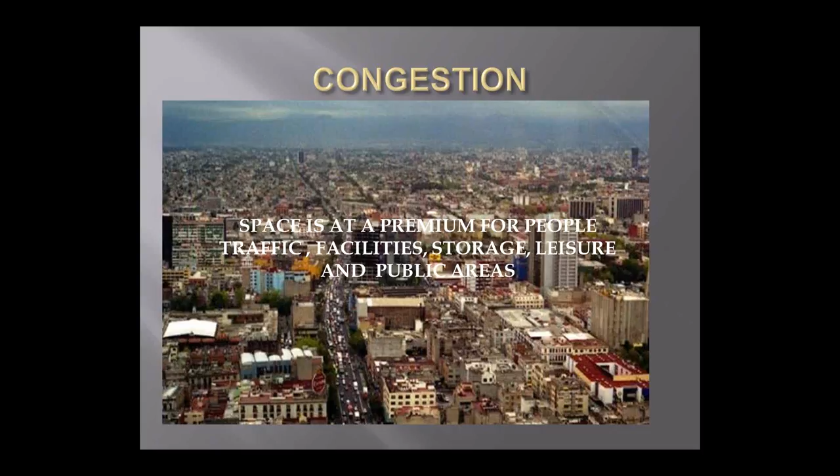One of the things we now know today is that 50% of the world's population has moved into urban areas, and it's predicted this will increase to 70% by 2050. Taking a look at this slide, you'll see we're getting pretty congested in a lot of these urban areas, and space becomes a premium, expensive and scarce. It makes people's lives unattractive if they don't have facilities, leisure and public areas. Somehow we've got to find space in these big urban areas, and developing underground is one possibility.

Now, there's nothing new about developing underground. As we all know, we've all traveled on metros and undergrounds, and these are very valuable in that they provide a method of transporting many millions of people each day, and reducing vehicle use, which is definitely beneficial.

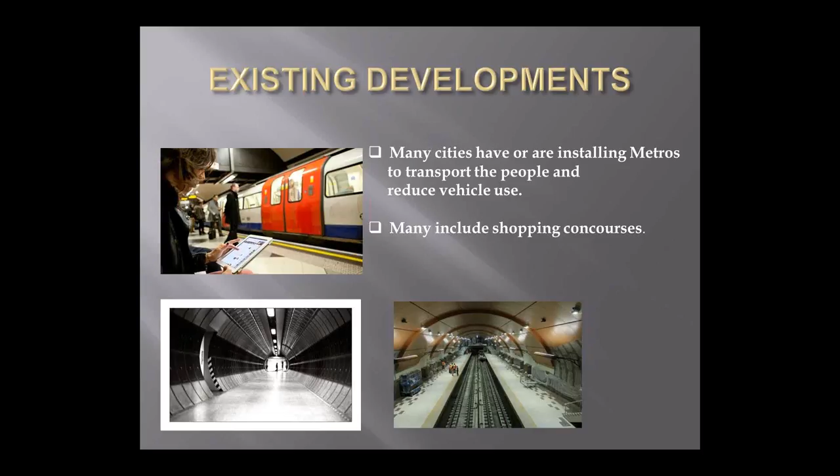Not only have these developments put in underground rail tracks, but many of the stations have taken the opportunity to develop commercial shopping concourses. If anybody goes to Hong Kong or a lot of other parts of the world, you'll find they include very substantial shopping facilities as part of the design. So already people are going underground, it's just how and where.

Here we've got some scenes. These are taken in Seoul, Korea, the two on the left, because there are huge areas of underground shopping and so on, and you can walk all over the center of the city without ever coming to the surface—it all interconnects. That's also true of other cities. Cities like Edmonton, and I believe Texas, have a lot of underground passages that allow you to go around. Houston has a lot of these underground passages that let you pass comfortably.

They have great advantages in many ways because they're very safe, there are no traffic problems, and they're comfortable in all kinds of weather. In Seoul it's because it's very cold in the winter; in Houston, because it's very hot all the time.

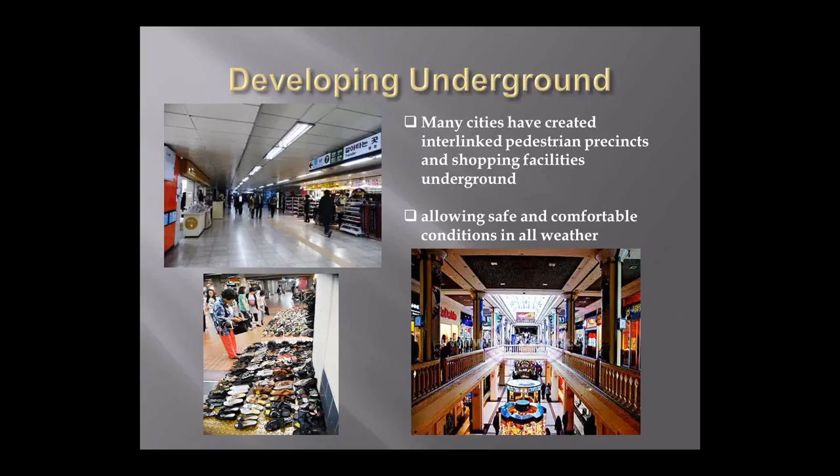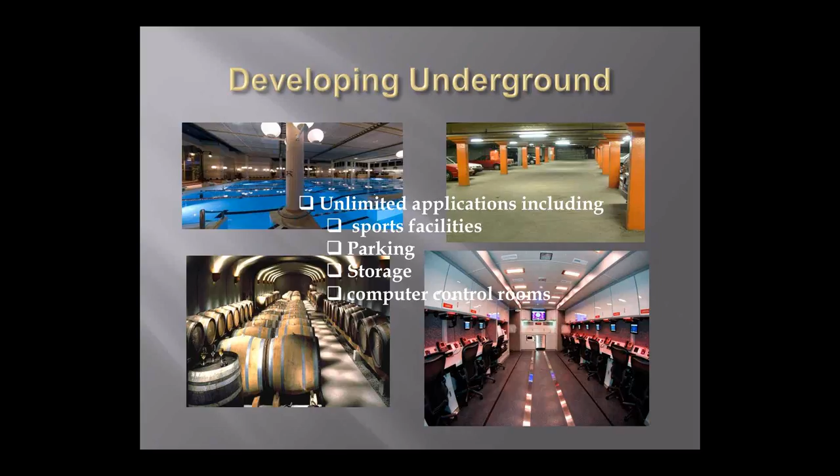Developing underground, when you think about it, there are lots of facilities presently on the surface that could be moved underground. Some already are, like parking, which I show there, but lots of sports facilities could be too. All these are underground shots. One of my favorites is the one on the left, the wine cellars—I'd definitely be interested in any projects of that kind. But all kinds of storage, like underground reservoirs for instance, would free up space at the surface. An interesting one is the computer control room to the right. Over and above that, you get military facilities, and lots of other things are possible.

So if we look at how these facilities have been constructed to date, we obviously have modern tunneling techniques, which have gotten up to about 15-meter diameter, and can be installed in all kinds of ground conditions using pressure balance machines, widely used for metro installations.

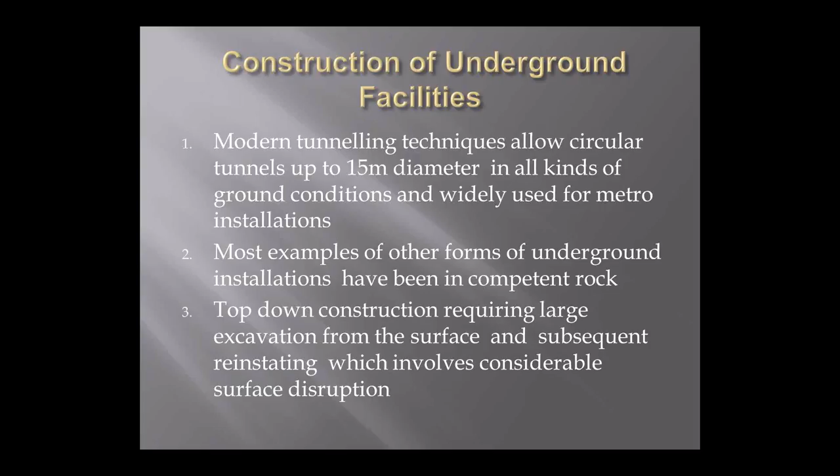Now, a lot of the examples I showed you previously were undertaken in competent rock. There's been a great number of underground facilities installed, for instance, in Helsinki, which is on competent rock and allows these things to be excavated out safely. If you want to do this kind of construction in areas that are not competent rock, in soft ground etc., up to now most of it has required large excavations from the surface and subsequent reinstatement, which obviously involves considerable surface disruption. What we're trying to do is eliminate that by constructing things in alluvial or soft ground soils, etc., which don't unduly disrupt surface facilities.

Let's talk a bit about horizontal construction. I had nothing to do with developing or formulating the first ideas on jacking pipes—that was done in the United States around 1890, as far as I can tell, jacking cast iron pipes into the ground to make culverts. I picked up on these ideas back in the 50s, and it's developed immensely all around the world.

We started with jacking pipes in, with men working inside them, but it wasn't long before we got into microtunneling, which allowed machines to do the excavation, with virtually no men working down the pipe—they were all working in the pit, adding pipes as each one was pushed in as the tunneling machine advanced. This has become an incredibly important method of tunneling in the last 40 years, and allowed a whole range of pipes, for instance in smaller diameters too small for men to work in, to be used.

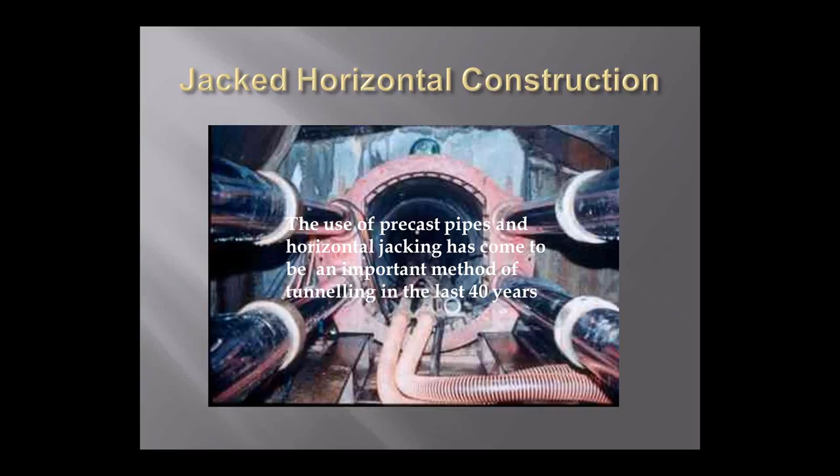But machines can do it without anybody having to be there with them doing the excavation. We won't go into that in too much detail, because it's a whole subject of its own.

But let's move on, because I'd like to talk about jacked horizontal construction of large structures. Way back, about 40-odd years ago, you'll see at the bottom is Brent Cross, UK, and that was one of the very first jacking jobs I did.

The principle of box jacking is shown on the right-hand side. You precast the box at the side, as you can see, and you jack it into position with excavation proceeding at the face. As excavation continues, you keep pushing it forward until you've got the thing into its final position.

That Brent Cross job was to open up a huge shopping centre, and the only access was under a main highway, so that's what we were jacking under there.

We've since been involved with maybe about 80 jobs, and one of the big ones that Chris was particularly involved with, and I was also involved with, though not to the same degree, was the Boston Big Dig, where they jacked huge boxes under the rail tracks, as mentioned in Chris's introduction.

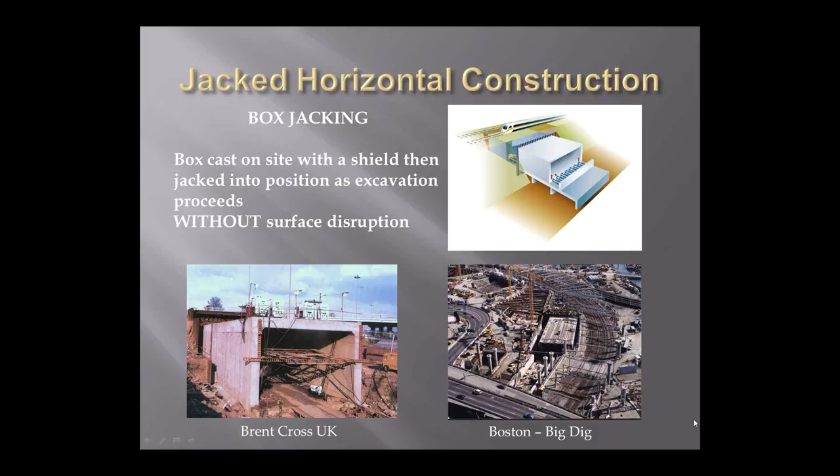However, that wasn't the easiest job in the world, because the ground conditions were pretty difficult there, and they had to freeze everything. That did cause some minor problems, let's put it that way.

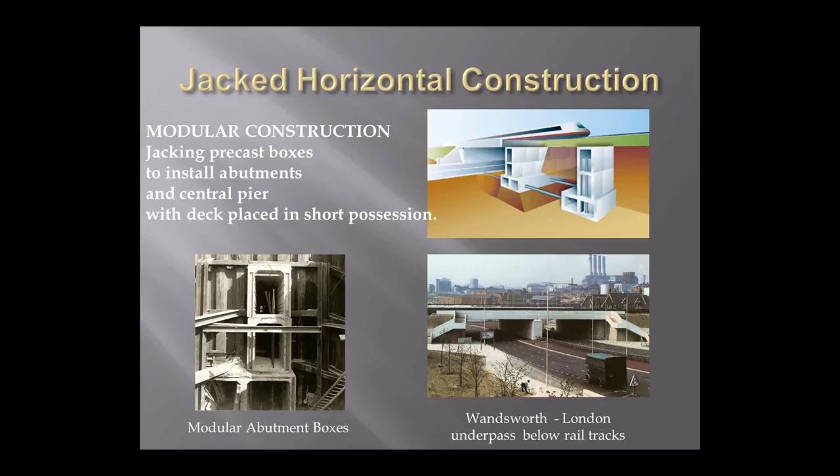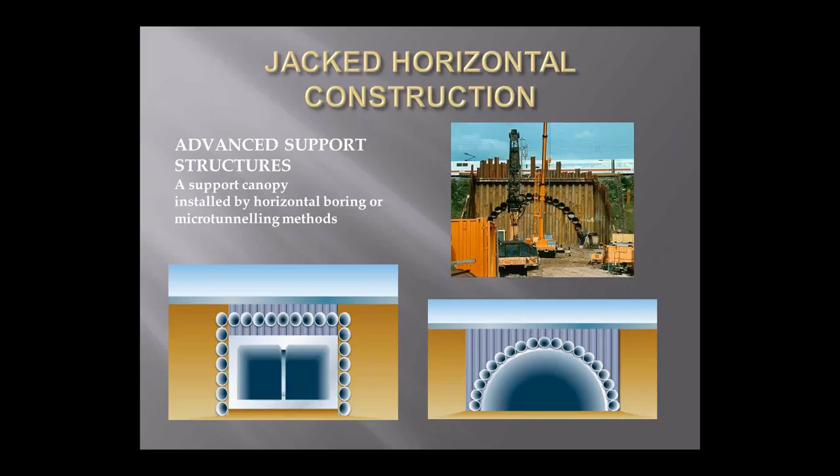Now I'm going to move on to some of our recent innovations. Firstly, the jacked arch, and then the jacked deck.

To simplify the concepts, both are based on breaking down the installation into controlled components, using high-quality precast units. Maybe the clever bit is combining tunneling with deck and arch units, jacked along a slide path.

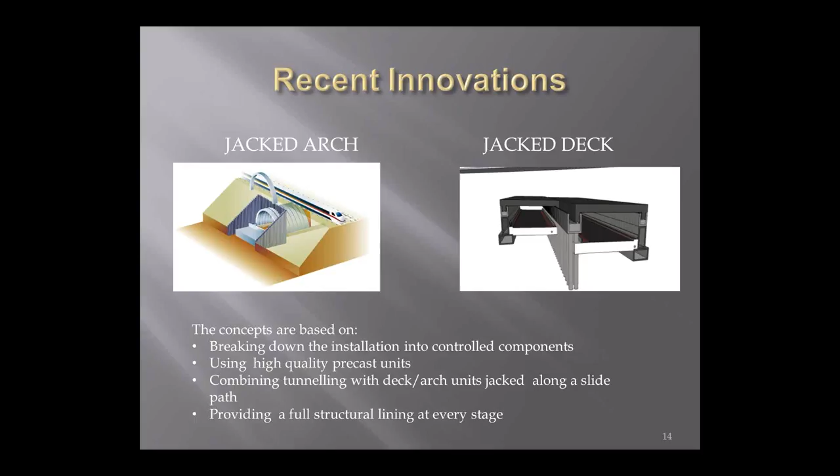So as you go, by either method, you're providing a full structural lining at every stage, which is a great advantage, as you can imagine, because we can't afford to have any collapses when you're putting one of these things under a railway. So these are the two concepts, and we've started to utilize them, and we believe they are an improvement on some of the traditional or existing methods being used.

We're going to illustrate this, and Chris is going to take over at this moment. He's going to talk to you about the Cliffsend underpass, which is an example of where the jacked deck was used. Now, Chris, I'm handing over to you, so you'll have the keyboard and mouse.

Have you got it? No? James, just give me one moment, I need to unmute him. We were having some feedback issues. Okay, there we go. Chris, can you hear us? I can hear you, I hope you can hear me. Okay, you've got the keyboard now, Chris, you should have the keyboard. I think you're still controlling it, aren't you, James? Well, I am, but okay, just a minute. Otherwise, James, if you just want to advance the slides, that might be the easiest thing to do. I'll just advance the slides.

Okay, good morning to you all. As James indicated, this section of our presentation shows highlights of a four-year cooperation between the main contractor and Jacked Structures during the development of the innovative solutions used to construct an extremely challenging new underpass beneath the existing mainline railway without causing any disruption to rail services throughout the construction period. Next.

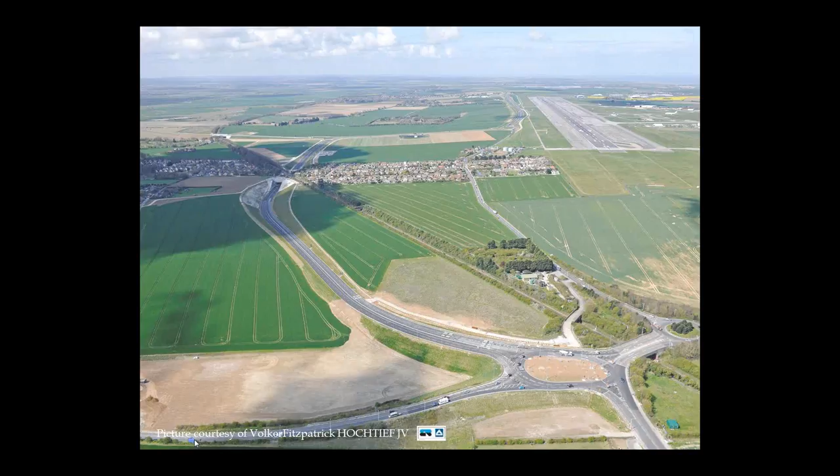Okay, well, to introduce this project, I'm starting with an aerial view of the completed Cliffs End section of the new highway. Here you can see the underpass section through the village of Cliffs End, the railway intersection, and on the right the Kent International Airport. At 126 meters, it is believed to be the largest jacked deck structure installed below live rail tracks in the world. The client was Kent County Council, the Highway Authority, and the main contractor was a joint venture of Volker, Fitzpatrick and Hochtief.

Construction projects do take a long time. The final phase was completed ahead of schedule and within the £87 million budget. The main construction contract was awarded by the Highway Authority in August 2009. Just go back, James, please. Just back, you want? Yeah. Okay, the start of the contract was October 2009 with an official opening in May 2012.

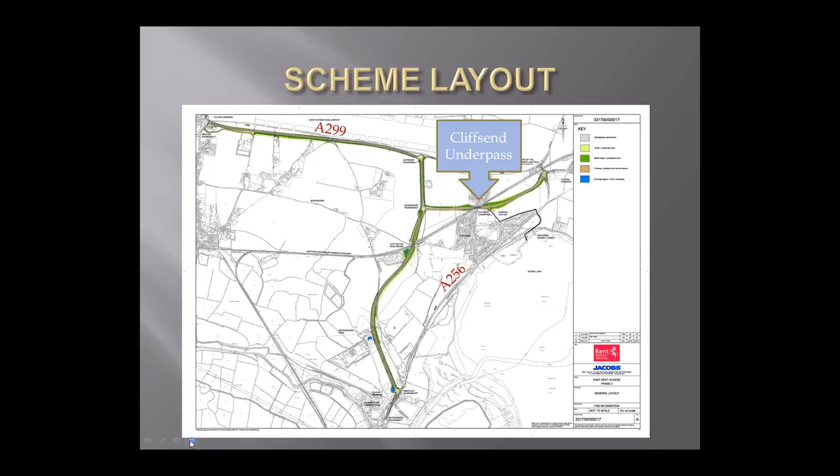There were many constraints in the area, including the operational requirements of the airport, the built environment around Cliffs End, and an internationally protected area known as Pegwell Bay, all of which restricted the choice of route for the highway. The only route available was through the middle of Cliffs End, beneath Foads Lane as detailed, and the main London to Ashford railway lines, which created the most challenging structure on the project at Cliffs End.

The construction operations obviously provided a formidable challenge, being constrained with 6 meters of overburden, heavily skewed, and in close proximity to the residential property you can see. There were a lot of main utilities, including sewers, substations, radio receiver masts, and Network Rail, who run Britain's railways. They were about to commence a new high-speed service to the new railway link at St Pancras International Station in London, and their rail operations were not to be disrupted during this construction stage. So the challenges were quite formidable.

Next. It's all right, there, I'm coming there.

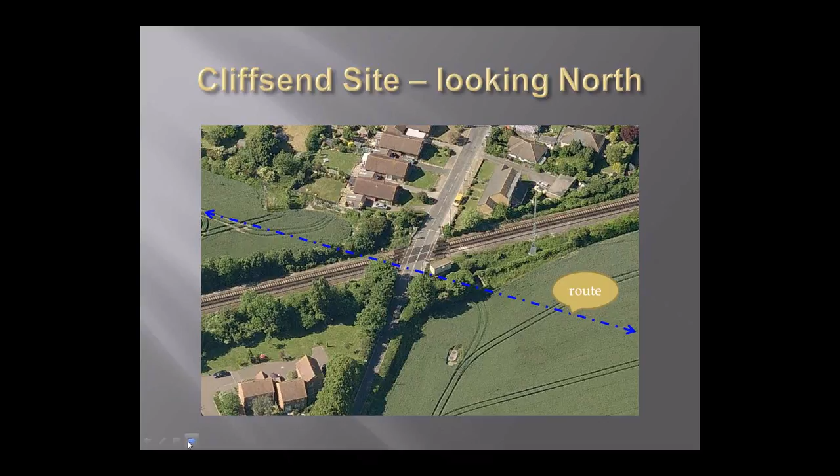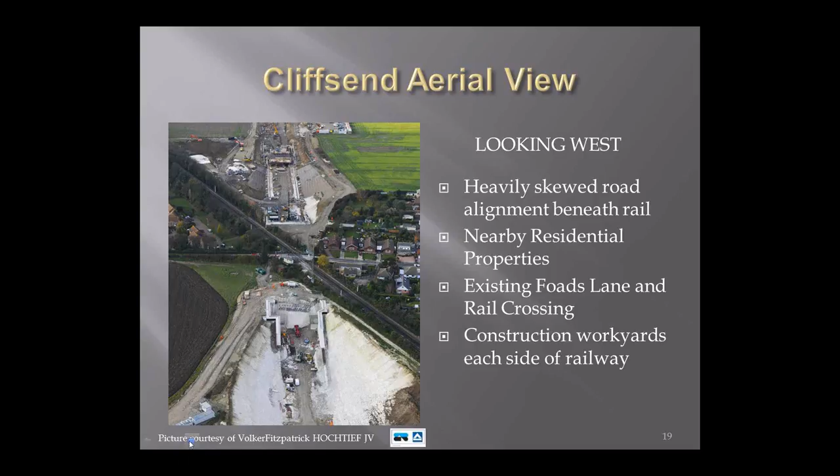This was based on a conventional twin large jacked box sections side by side. But due to various concerns relating to jacking capacity, controls on alignment, and the height of the open face, which could lead to unacceptable settlement, the team agreed to a different approach.

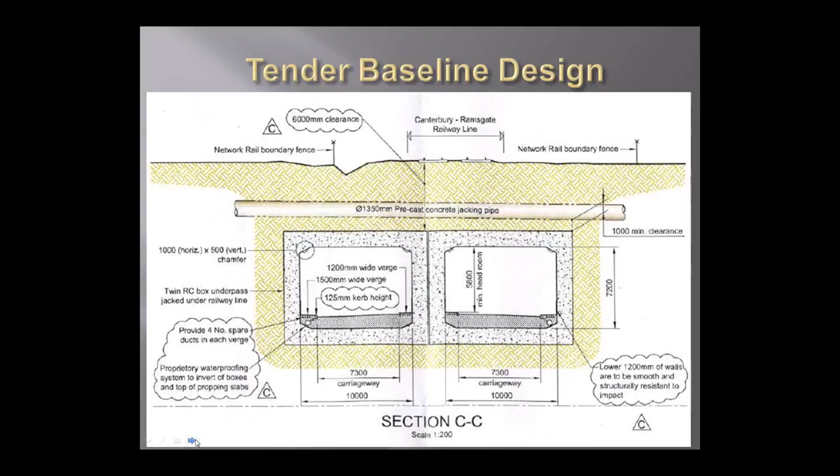That's the original twin box solution. Yep, there's the alternative. So these were the design alternatives that our team developed, and this was the tender proposal, which shows the jack deck on multi-level jacked boxes.

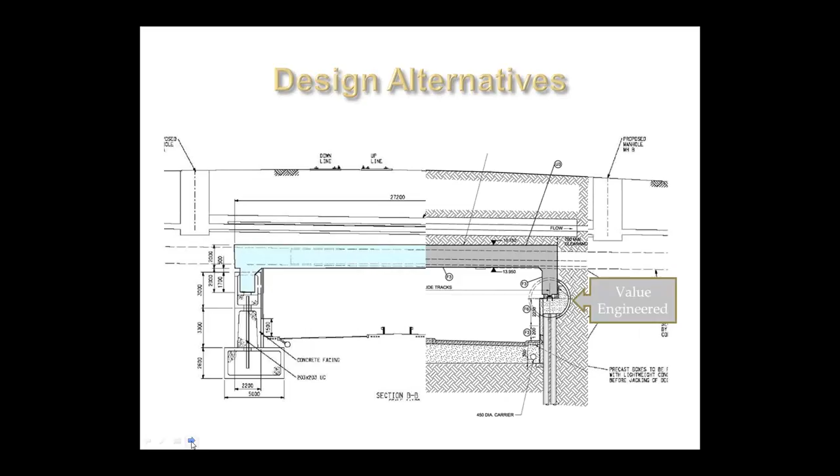Following award of the contract, the team carried out a number of technical reviews with value engineering, and on the right-hand side is an indication of the final solution that was chosen for construction after value engineering.

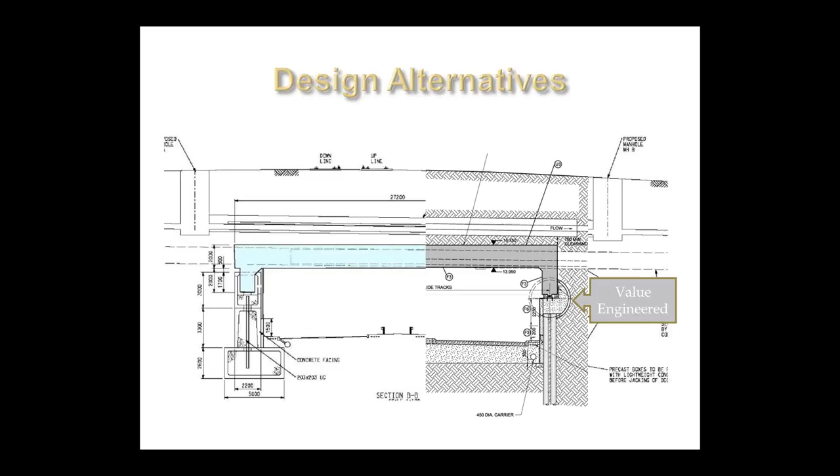The modular foundations were replaced with a large diameter bored tunnel within which reinforced concrete would form the abutment, and bored piles would provide the support to the adjacent ground.

Looking at the bored tunnel in detail, these provide horizontal space about 10 meters below the railway from which construction can be carried out safely without interruption to rail services above. The sketch indicates the various elements of the slide path, the reinforced concrete abutments, and the bored piles.

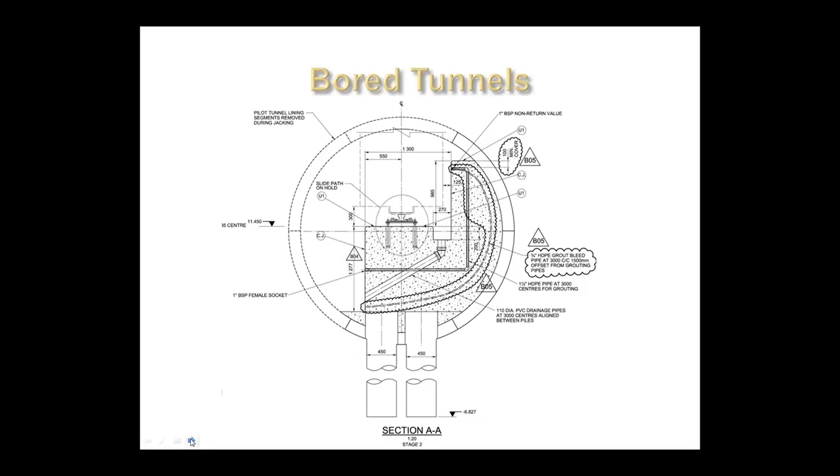Later, during the subsequent deck jacking operations, a number of roof segments would be removed to expose the slide track, but that would be within the protection of the main tunneling shield.

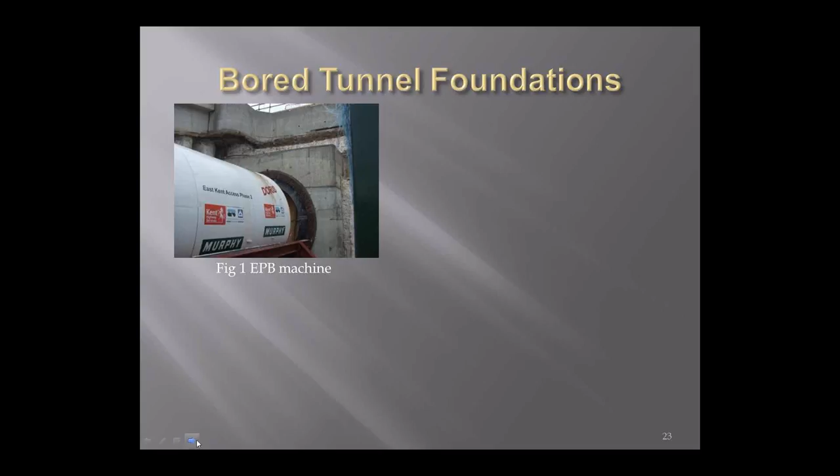Now we move on to an indication of the earth pressure balanced tunneling machine used to drive two 126-meter long tunnels. Rail track movement was continuously monitored from robotic total stations, and a vertical movement was detected of only 3 millimeters, which was splendid work by the tunneling team.

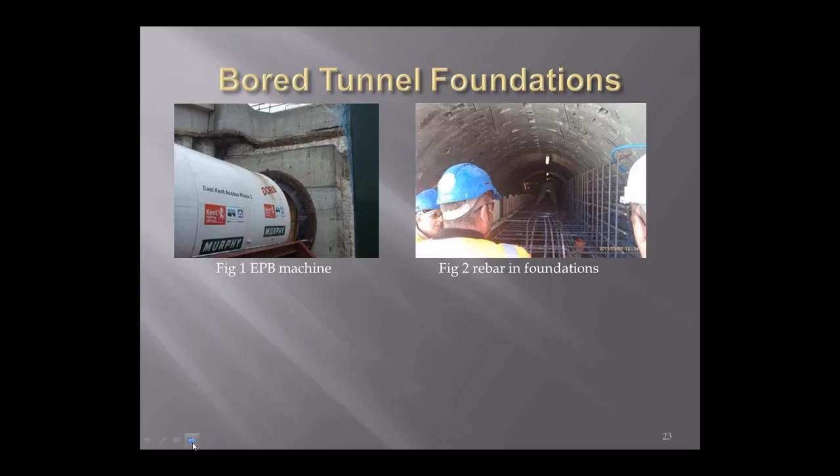This was immediately followed by the installation of 530, 450 millimeter diameter bored cast in situ piles. Reinforced concrete pile caps were constructed, and the photograph on the right gives an indication of the installation of the reinforcement within the tunnel to form the foundations.

One important point at this stage is that quality control is essential throughout, with close attention to tolerances to ensure installation of the deck could be achieved. You get one chance in these projects to get it right, and even minor out-of-tolerance construction elements have to be rectified fairly quickly. The main slide track installed within the abutments incorporates a stainless steel sliding surface along which the jack deck bearings slide.

The system consists of thick elastomeric bearings with a bonded PTFE surface, with a total vertical load applied of 50,000 tons. Flexibility is contained within the bearings, and the slide track installed to a tolerance level of plus or minus half a millimeter. The tunnels were completed within an 8-week program in 2010.

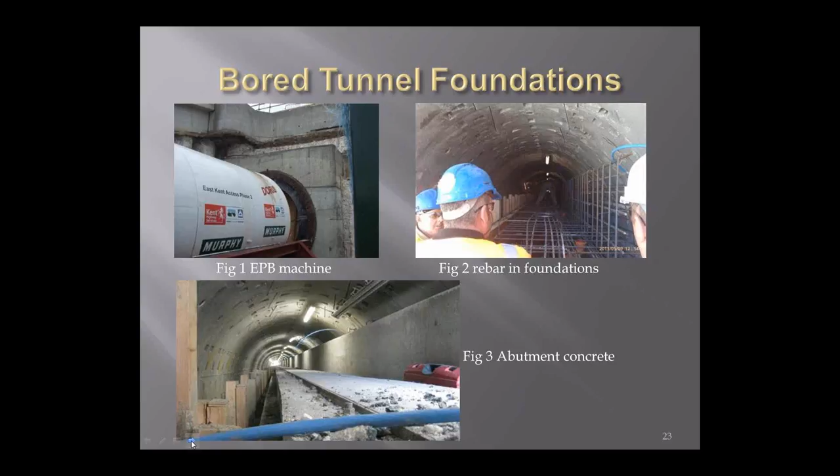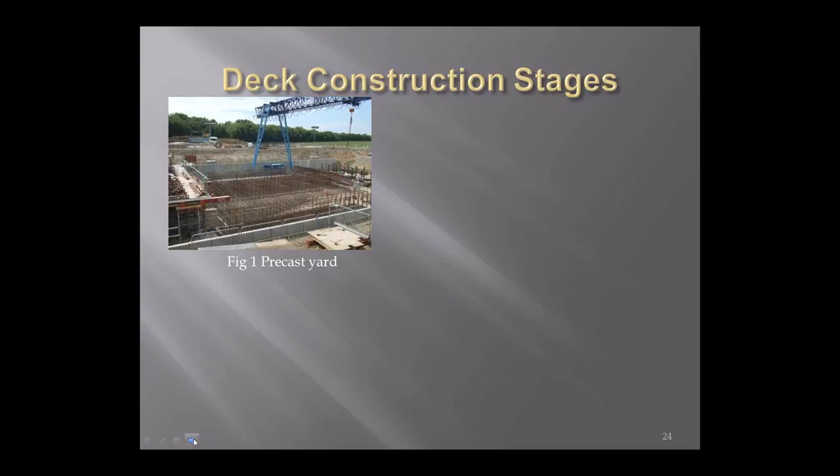So now moving on to the actual deck construction stages. The underpass roof comprised 6 abutting precast concrete deck units, each 23 meters wide, 22 meters long, and 1.8 meters deep, heavily reinforced slabs with short downstands.

Between each abutting unit, an intermediate jacking station is positioned with a steel skirt to maintain support of the overburden as the units open and close during installation.

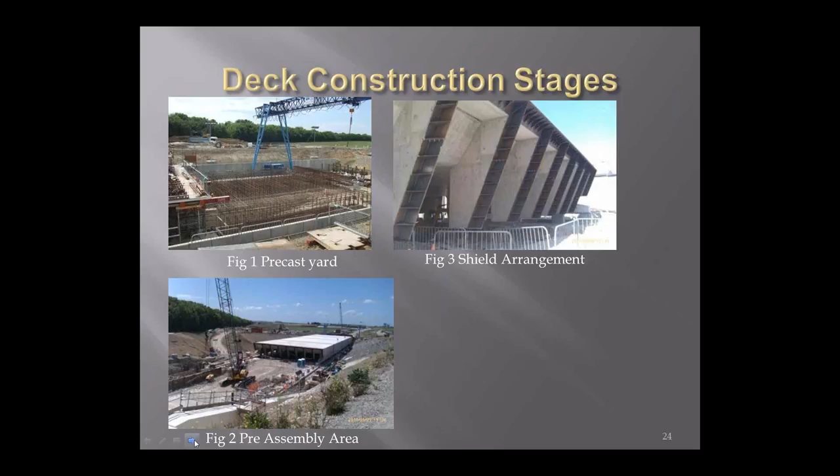The lead unit, figure 3, incorporates a mining shield with cutting plates designed to provide intimate support and contact with the open face excavation. 8 working cells provide space for the excavation plant and miners.

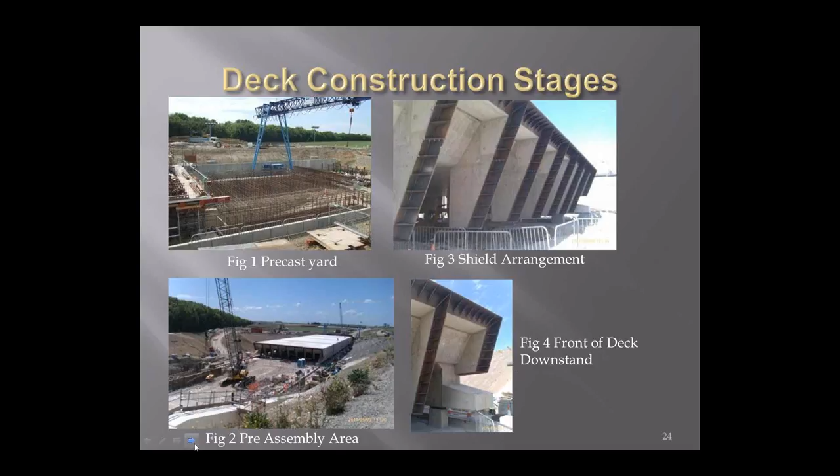The design is such that the lead shoe moves into the pre-bored tunnel on the slide track, and the clearance to the shield above allows enough area for miners to remove a number of the tunnel segments as the work proceeds. So again, close tolerance and close attention to detail is very important at this stage.

This is just a view of the pre-assembly area. The size of each deck unit required a casting yard some distance from the launch area, right at the back of the photograph. Then in sequence they were moved forward on temporary slide paths to an assembly area where the final fit-out could be undertaken before moving each unit in turn onto the launch pad.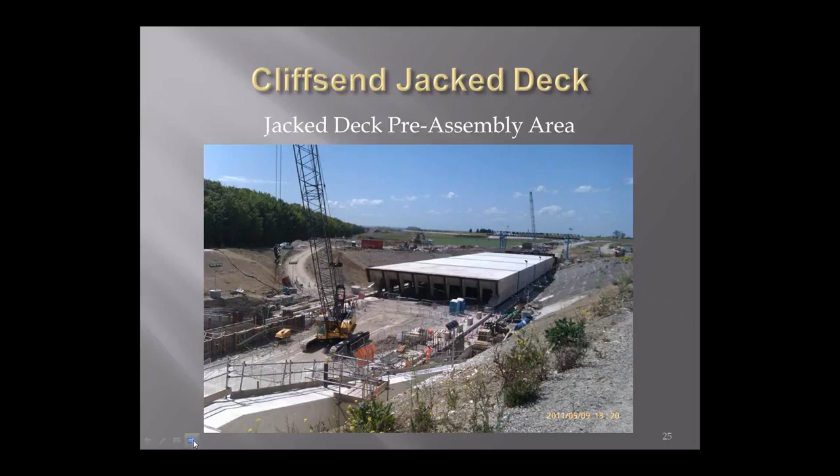The final fit-out could be undertaken before moving each unit in turn onto the launch pad. The actual casting yard was about 150 meters away from the shield entry point, before going beneath the railway.

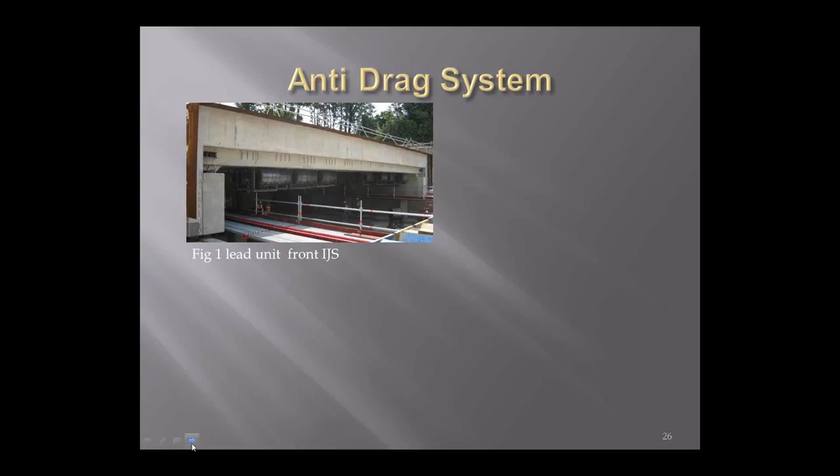An essential requirement for large underground jacking operations is to maintain ground stability and reduce frictional resistance from the unit in contact with the ground. It's been common practice when undertaking box jacking works to introduce what we call an anti-drag system between the top surface of the jack box and the overlying soil.

At Cliffsend, the general depth of overburden, being some 6 meters below rail track bed, is such that large-scale lateral movement of the ground was considered a very low risk. The shearing resistance at the sides of the ground block above the proposed deck offers ample resistance against wholesale lateral movement. But lateral movement of soil at the interface between the deck and the overlying ground could occur due to frictional forces, and such migration as the deck is installed could be expected to contribute to settlement or heave on either side of the railway.

And for this reason, an anti-drag system focused upon the need to mitigate ground migration.

Figure 2 shows the sheets. They're stored in rolls in the roof of the front unit. These sheets are high-quality steel, 2 millimeters thickness, and they comprise 2 sheets per drag sheet in order to deal with the high tensile forces developed as the jacking proceeds. At figure 3, the head wall anchorage system can be seen. This is the leading or free end of the drag sheet. It's fed up through slots in the shield and then anchored back to the head wall above, so that when the deck unit moves into the ground beneath the head wall and under the railway, the sheets are gradually moved out onto the deck of the unit and remain static with the soil above.

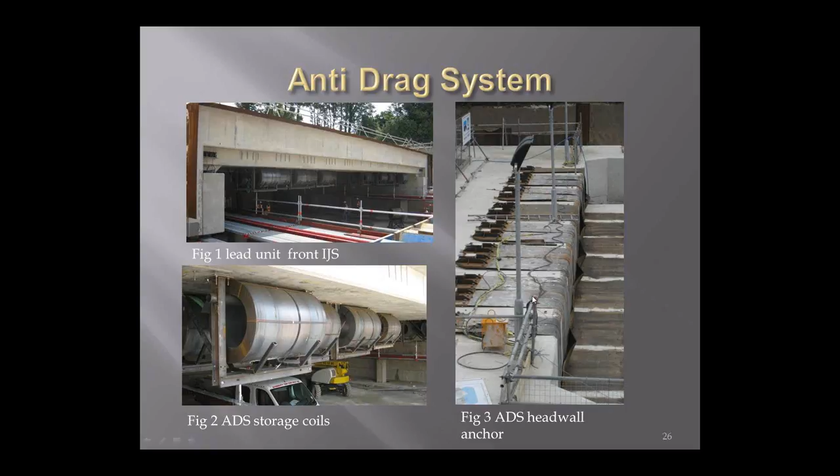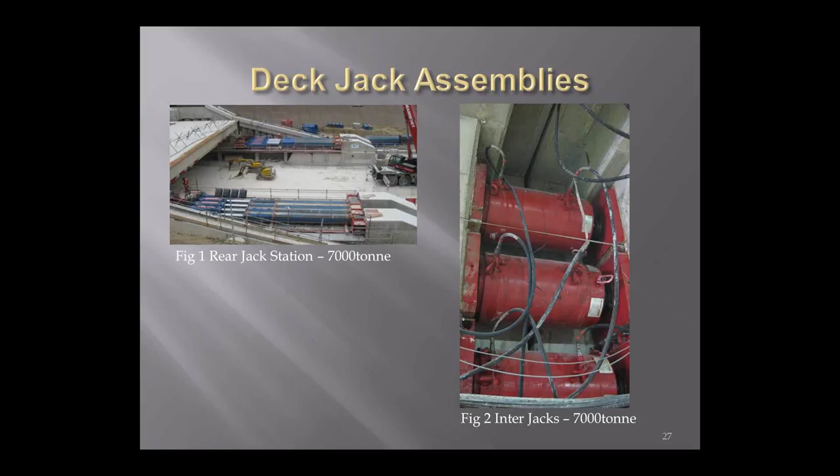Looking at the jacking system, 2 jack assemblies were incorporated into the project: rear jacking stations with a capacity of 7,000 tons, and intermediate jacking stations between each unit, also comprising 7,000 tons. The intermediate jacking stations had a stroke of 300 millimeters, while the rear jacks had a long stroke of 2.5 meters.

The project requires a very sequential movement of units from the launch pad through to final completion. The operation of intermediate jacks plus the operation of the rear jacks results in an accumulated jacking load applied throughout the whole job, and that graph indicates the total applied jacking resistance during installation. In fact, the combined load at completion of the job was under 15,000 tons. But you've got to have a lot of reserve capacity, which is required in the event that you might hit obstructions, or there may be some steerage requirements or other unforeseen situations. Having sufficient jacking capacity in reserve provides a certain benefit.

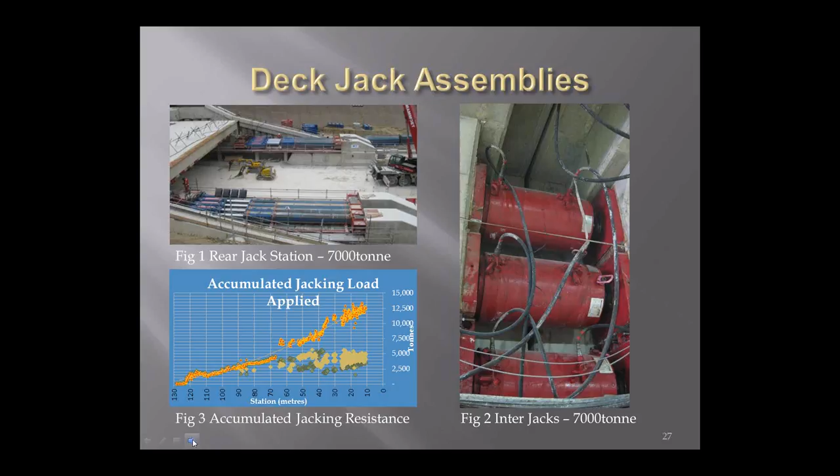Now moving into the front end, the working end of the shield. This is a view just at the start of the shield going into the ground. You can see in the roof the drag sheet rolls and the beginning of mechanized operation in order to gradually peel the material from the excavated face and remove it to the rear of the unit.

Ground conditions on this particular project were fairly competent chalk, but there was an alluvium-type material called Thanet Sands and gravels overlying the chalk, which did penetrate into the shield by up to about 2.5 meters. On the top corner of the shield that's embedded, you can see an indication of the Thanet Sand in that portion of the shield.

A later shot shows the shield fully penetrating the ground. The shield provides pressure which maintains support and mitigates any risk of ground movement during the continuous installation of these units. Each deck unit was installed in 7 days, with a turnaround time of about 3 days for installing subsequent units on the launch pad, totaling about 10 weeks for completion of the 126 meters installation.

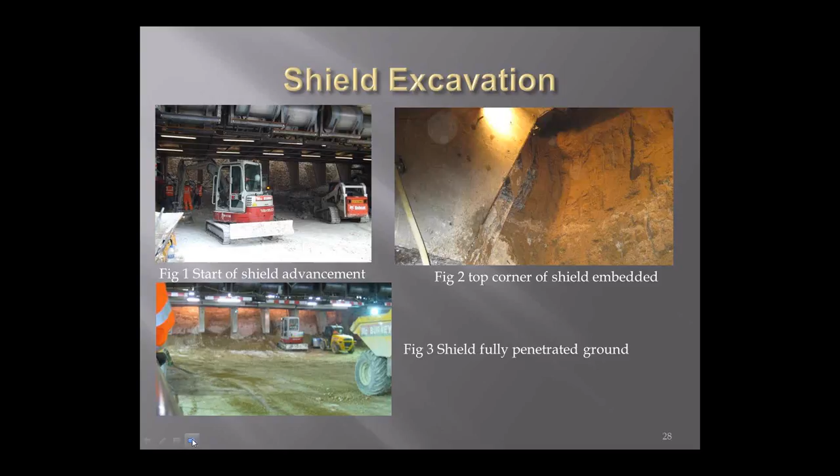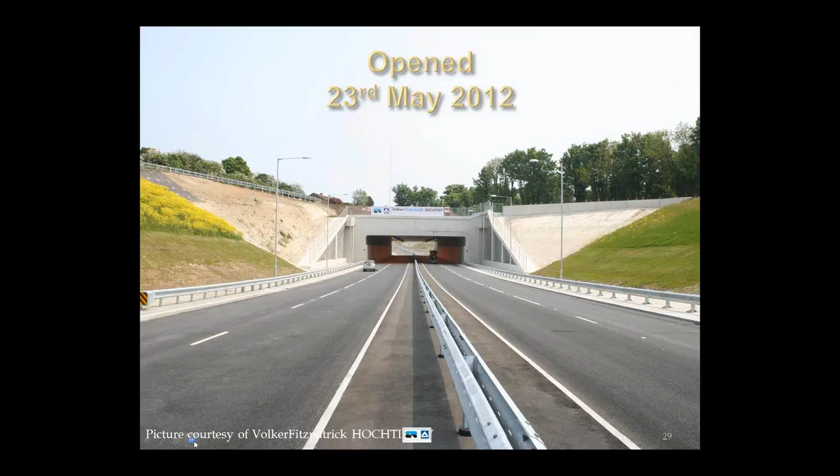A view of the completed job, opened in May this year, with quite a number of achievements. It was built 5 months ahead of schedule, built within budget, built safely, and most important, built without interruption to rail services. On that final shot, I'll now hand back to James, thank you very much for that section.

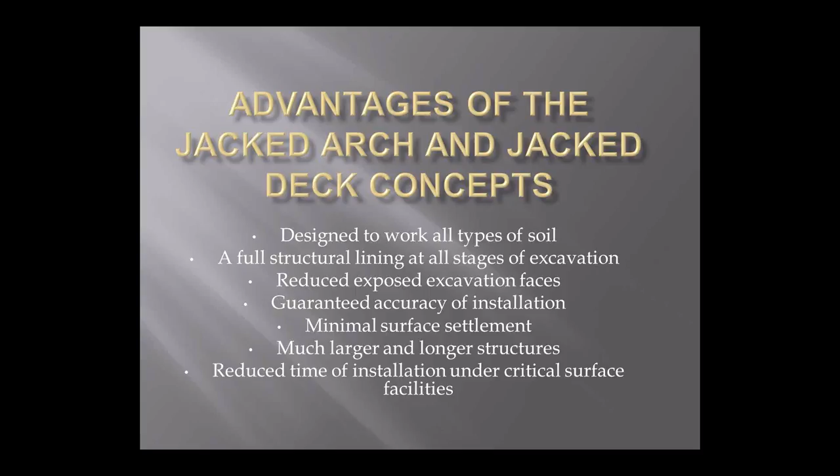And of course, what's important for a lot of the clients is the reduced time of installation under critical facilities. Now, I believe there are lots of opportunities for creating underground space, and a whole range of larger and longer underground installations are now possible in a wide range of configurations.

I would point out that many cities are built on the edges of rivers next to the ocean and are not on competent rock. They are on alluvial type conditions, so putting large structures underground is more difficult. But I believe we've got some potential answers.

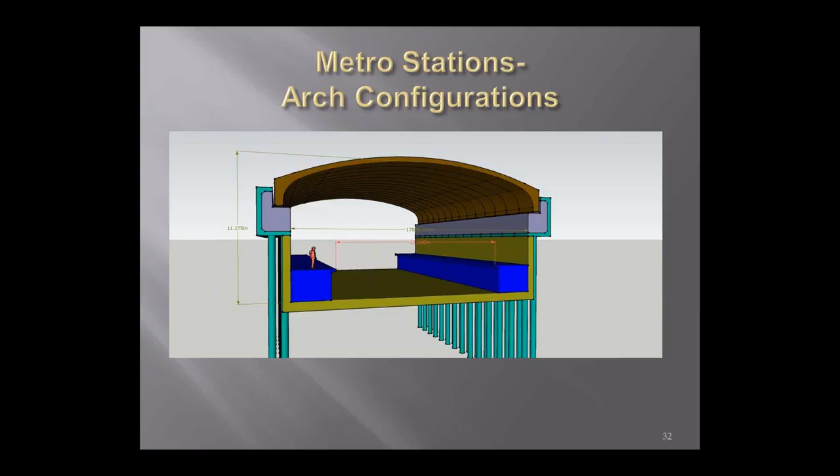One of the things we've done is develop a number of possibilities for putting full metro stations in. Here's one example where we've used the top box with piles out of it and a flat arch. But there are others—we could use abutment and a flat arch. We've got the modular foundations there and the walls. You could easily arrange a four platform arrangement if you wished.

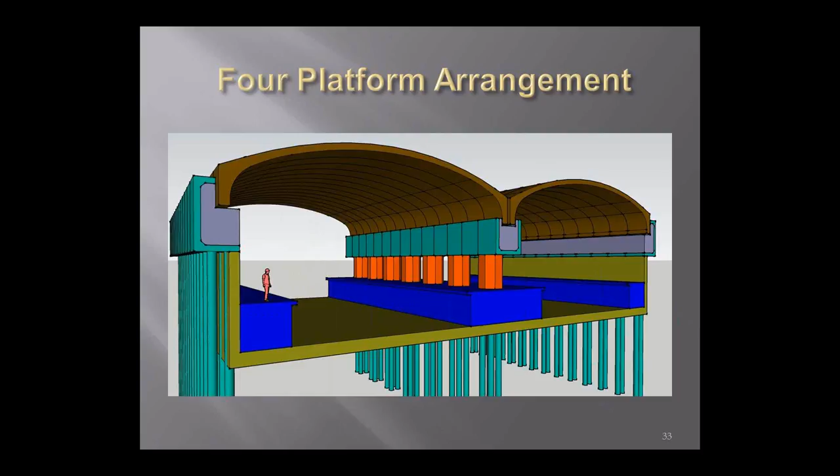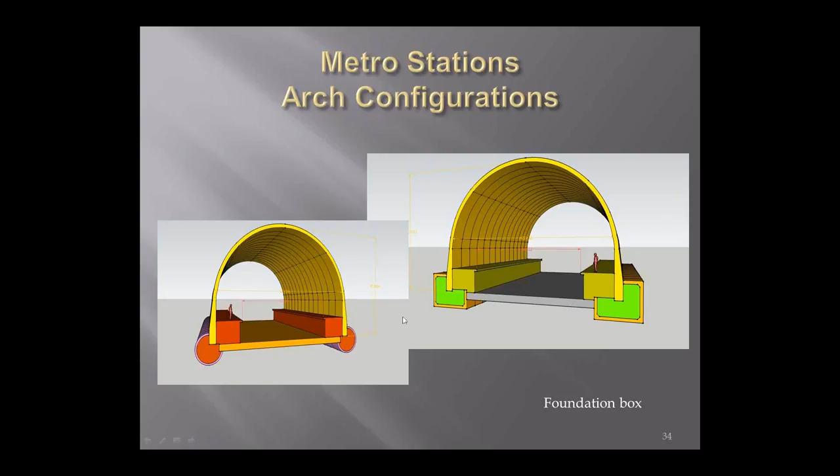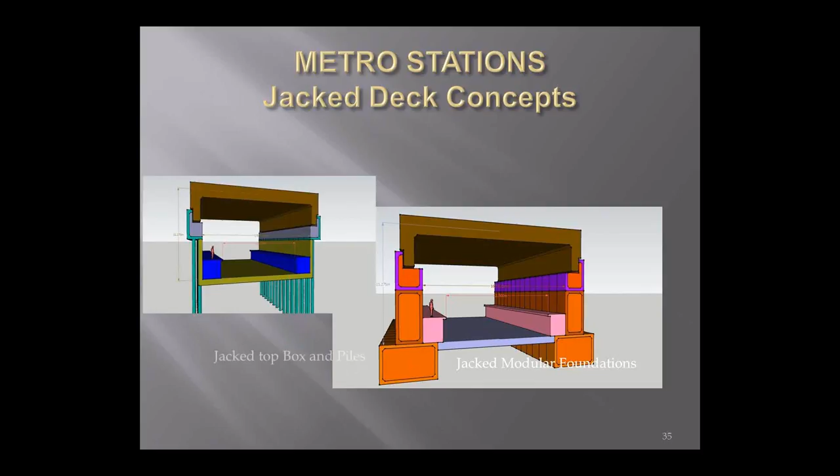The jacked deck concepts also lend themselves to all kinds of structures. There's the jacked modular foundations with the jacked deck like we used at Cliff's End, but for a station it's much smaller than Cliff's End's 20-meter clear span. Here you would want something about 10 meters, more than sufficient for most rail metro stations. And there's another alternative—top box and piles.

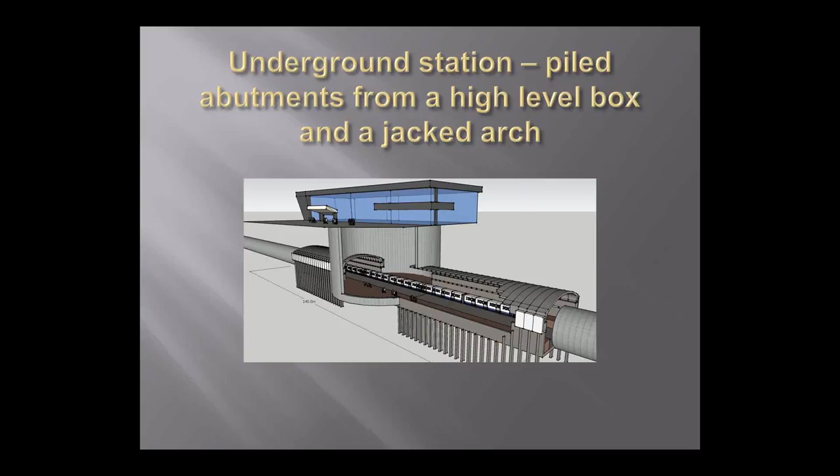And here's finally our concept of how we would undertake a full metro station from the top. We would sink that central shaft, which is required for access anyway, and from there we would install the rest of the station by jacking, in this case, a high-level box and a jacked arch. And there is the concept that we're suggesting for metro stations, but you can apply these things in all kinds of ways underground. I set out a number here.

And I've added, apart from the ones I mentioned earlier, wastewater and water treatment plants, because certainly in a lot of cities, those plants take up a lot of room and are not exactly the ideal thing to have in a large urban center.

And another one—they're doing this in Hong Kong—they put in the refuse collection and disposal depot, which is not a very popular thing, with rubbish trucks, smells, etc. By putting them underground, they've released land at the surface and also got rid of a not very pleasant environmental facility. And of course, a number of military facilities are conveniently put underground.

The Swiss, where I live, like to put their aircraft in big rock tunnels underground to keep them safe.

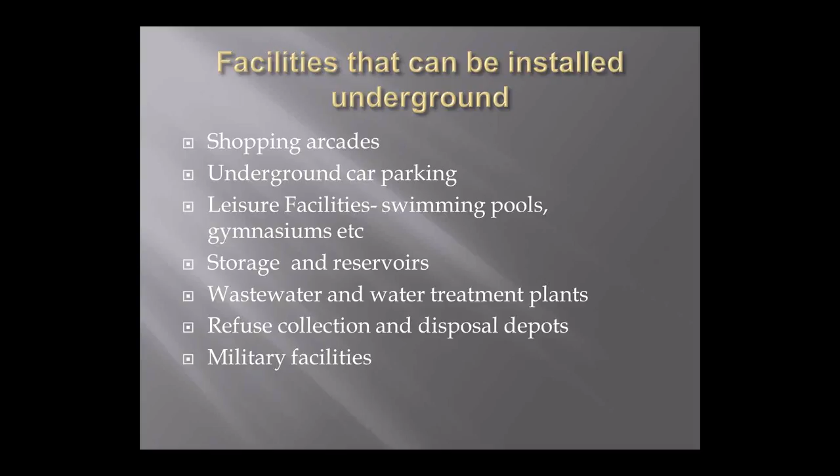So those are just some of the ideas that we might use in the future, and we believe that we can now do this in ground that you couldn't have done it with before. So I'm now handing it back to you for any questions, and I will try and answer them, Chris and I.